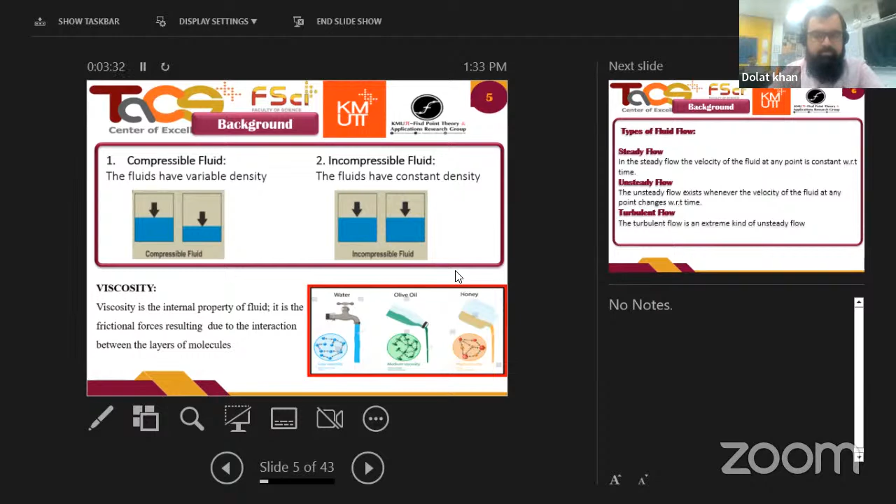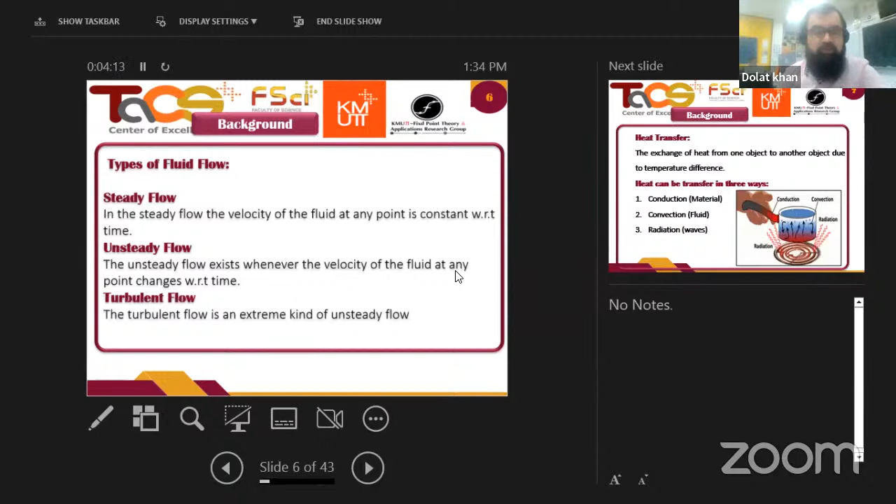Okay, we have many types of flow. Some of them are steady flow. In the steady flow, the velocity of the fluid at any point is constant with respect to time. It means it does not depend on time. On the other hand, unsteady flow exists whenever the velocity of the fluid at any point changes with respect to time. It means this flow depends on time. And after that, turbulent flow. The turbulent flow is the extreme kind of unsteady flow. It means it changes extremely with respect to time.

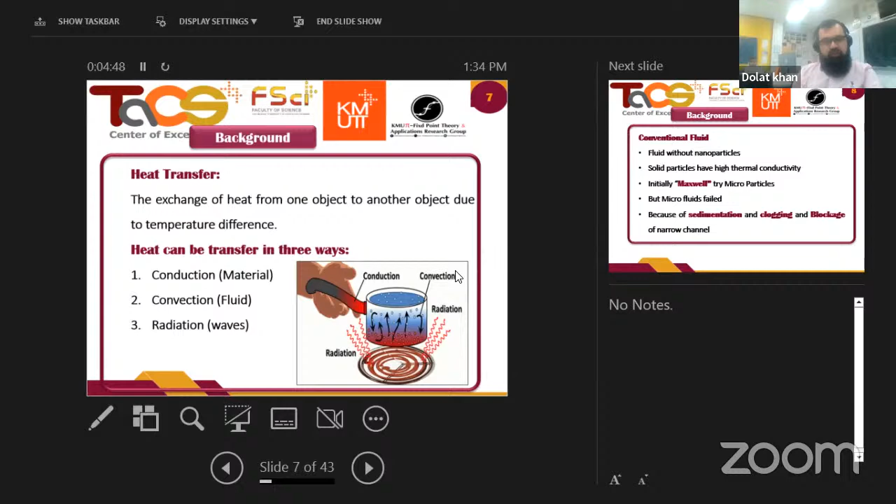Also, we take some heat transfer, so we must know about heat transfer. Heat transfer is the exchange of heat from one object to another object due to the temperature difference. There are main three ways. The first one is conduction. Conduction is that type of heat transfer which transfers the heat through material. The second one is convection, and this type of heat transfer occurs in fluid. And the third one is radiation, in which heat transfer occurs by waves.

In fluid dynamics, many researchers are working on fluid without nanoparticles, but it has a problem to enhance the thermal conductivity. For this purpose, we have some solid particles which have a high thermal conductivity and which can be used to enhance the thermal conductivity. Initially Maxwell tried to put microparticles in a base fluid, and it created a microfluid, but this failed due to sedimentation, clogging and blockage of narrow channels.

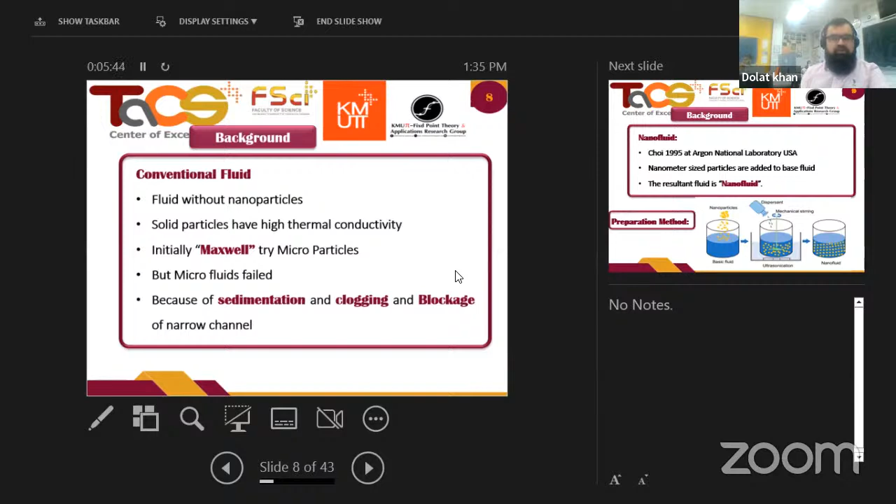After that, in 1995, Choi worked in Argonne National Laboratory in the USA, and he invented nanometer size particles and added them in a base fluid, and that became a nanofluid. And this nanofluid is used to enhance the thermal conductivity of fluid. This is the preparation of a nanofluid, in which we add some nanoparticles in a base fluid, and we create some nanofluid.

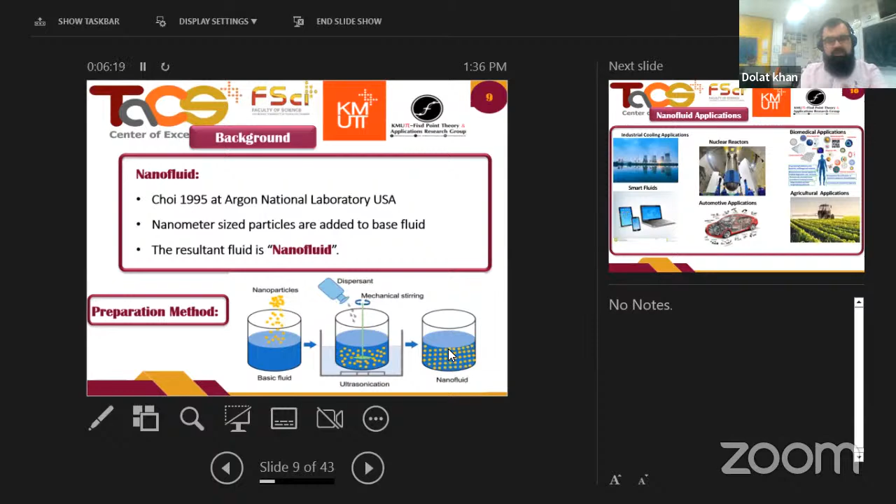These are the main applications of nanofluid, which can be used in industrial cooling applications, nuclear reactors for cooling purposes, biomedical applications for drug delivery, and so on, and also in computer and mobile accessories, in automotive radiators, and also some agriculture applications.

But after that, researchers worked on nanofluid and got a modified nanofluid, that is hybrid nanofluid. Hybrid nanofluid is the modified version of the nanofluid, in which we insert two or more nanoparticles at the same time in a single base fluid, which becomes a hybrid nanofluid. Initially researchers tried two nanoparticles, but nowadays researchers are trying to enhance thermal conductivity more. For this purpose, they tried the trihybrid nanofluid.

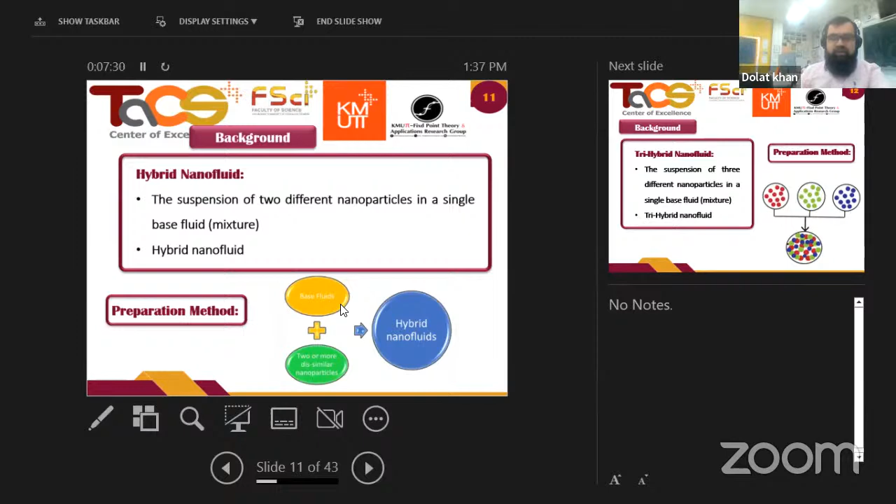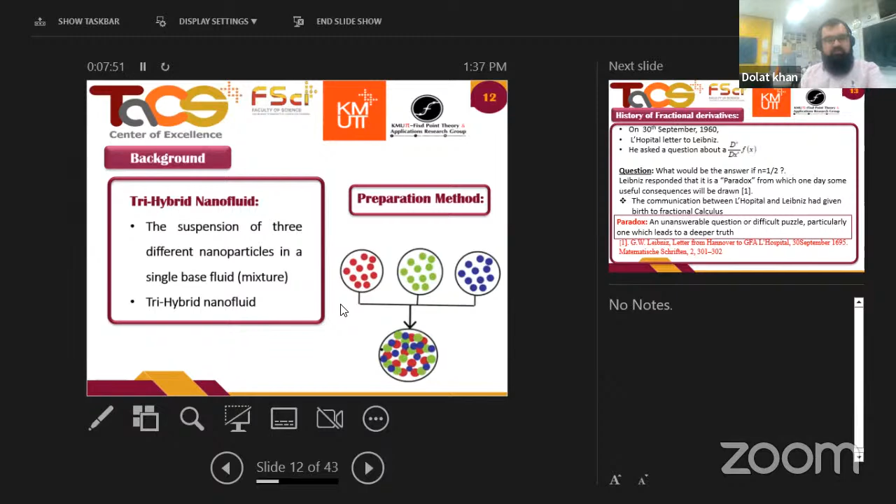So trihybrid nanofluid is a modified version of the hybrid nanofluid, in which we add three different types of nanoparticles in a single base fluid to prepare a trihybrid nanofluid. This is the modified form of the initial hybrid nanofluid. We use a fractional model for generalization of our problem, so we must know about fractional derivatives.

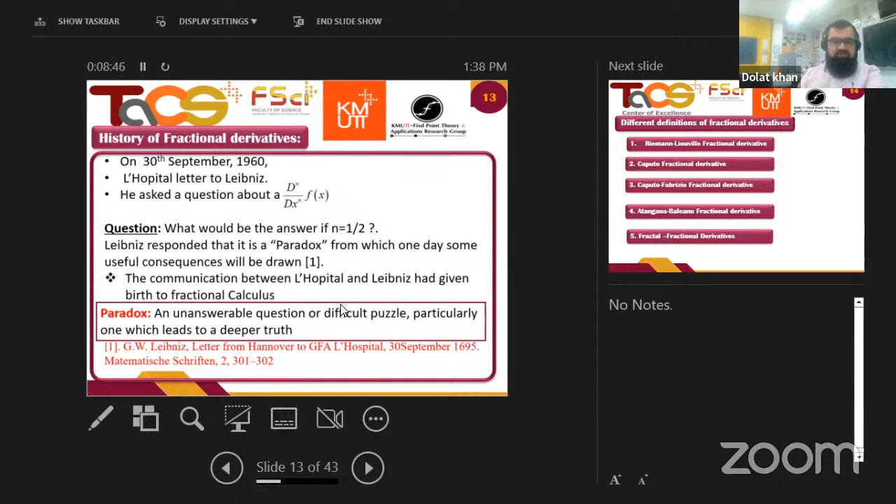Initially, on 30th of September 1695, L'Hôpital wrote a letter to Leibniz. He asked a question about the power of the derivative: what will happen when the power of the derivative becomes 1/2, fractional? Leibniz responded that it is a paradox, and one day maybe some useful consequences will be drawn. The communication between L'Hôpital and Leibniz gave birth to fractional calculus. This is the initial conversation, and we say this is the birth of fractional calculus.

After that, many researchers worked on different fractional derivatives, and some of these are the Riemann-Liouville fractional derivative, Caputo fractional derivative, Caputo-Fabrizio fractional derivative, Atangana-Baleanu fractional derivative, and all of these are used in different fields of research, in fluids as well as many other fields. But recently we tried the fractal fractional derivative, which is the newest fractional derivative used by researchers.

This is the significance of our study: the results obtained from this research will help enhance the knowledge of fractional models in fluid dynamics, nanofluid flow, and especially trihybrid nanofluid flow, and a base for complex non-linear flow problems recurrently taking place in engineering and applied science. This type of study can help engineers and scientists understand the physical trends and features of various nanofluid flows, that is nanofluid, hybrid, and trihybrid.

And the fractal fractional model will provide deeper study of the rheology of fluid flow as compared to the fractional and classical models. It means that the fractal fractional model will help provide more realistic phenomena, a more realistic model compared to the classical and simple fractional models.

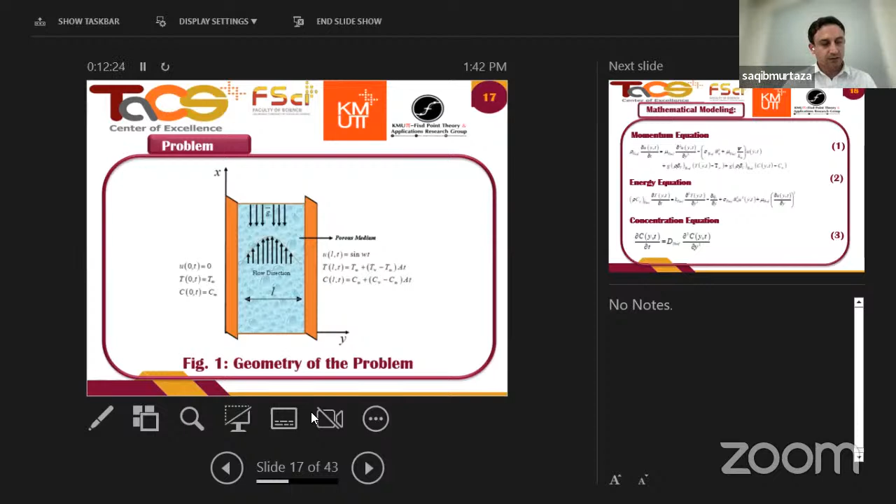So let me start from the geometrical configuration of the flow phenomena. In this geometry, we have considered an unsteady fractal fractional order model of nonlinear trihybrid nanofluid in an open bounded channel of length L. Furthermore, the impact of thermal radiation, Joule heating, and viscous dissipation has also been considered in this study.

Hello? Yes, I can. My voice is clear? Yes, yes. Okay, sorry for the interruptions. Furthermore, please go back to the geometry. Please go back to, yes, this one.

The impact of thermal radiation, Joule heating, and viscous dissipation has also been considered in this study. A magnetic field of strength B0 is transversely applied to the fluid flow. At the beginning of the analysis, both the channel and the fluid are assumed at rest, but after t = 0+, or t > 0, the temperature and concentration of the fluid rise to time-dependent concentration and temperature. All of these things you can see in this geometry. Please next.

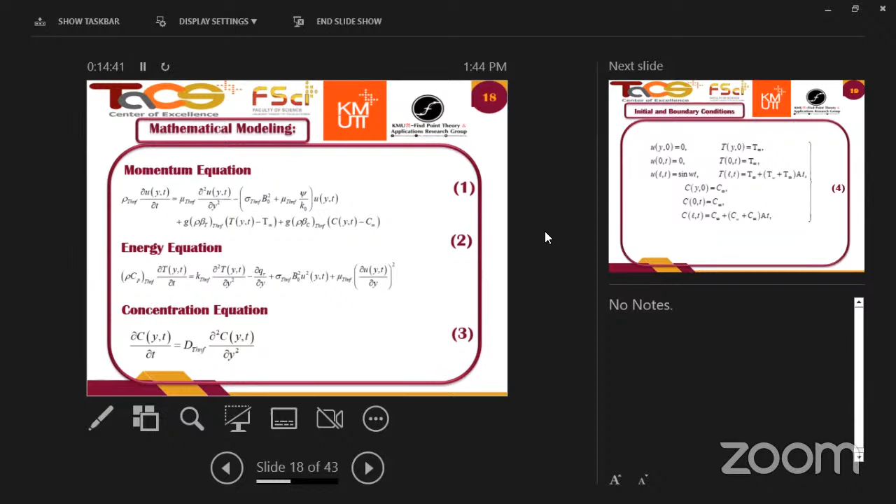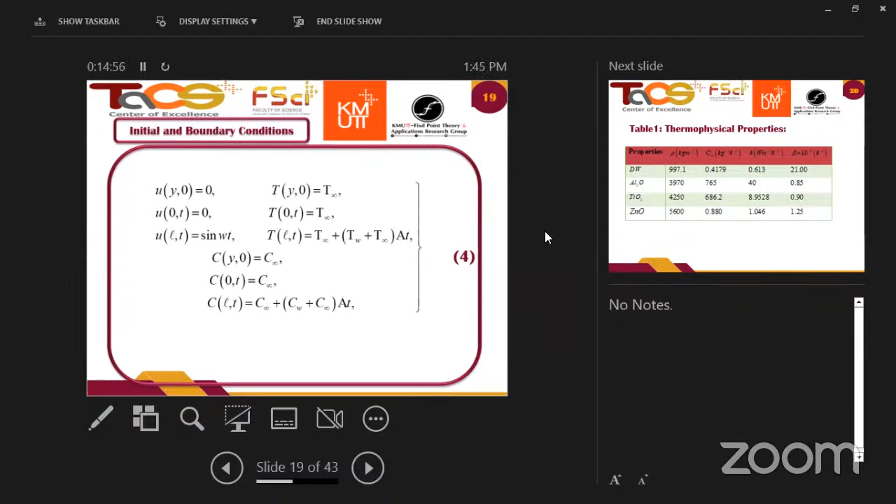These are the associated boundary conditions. At the left plate, we have no motion, but at the right plate, we have sinusoidal oscillations with sin(ωt). And also we have variable temperature and variable concentration.

These are the thermophysical properties of the base fluid and the three different nanoparticles. The base fluid considered is DW, that is distilled water. And the particles are aluminum oxide, titanium dioxide, and zinc oxide. All these thermophysical properties are obtained experimentally.

To make our system dimensionless, we will use the dimensionless variables given in equation 5. Incorporating all these equations, we will get our momentum equation in the form of equation 6. The heat equation will be in the form of equation 7. And

Next, please. Next, please. Yeah, we are already in the next slide. So I didn't see anything here. Okay.

Equation 8 is the concentration equation in dimensionless form, along with the associated initial and boundary conditions given in equation 9. These are some constants which we obtained during the non-dimensionalization process. These are also some constants.

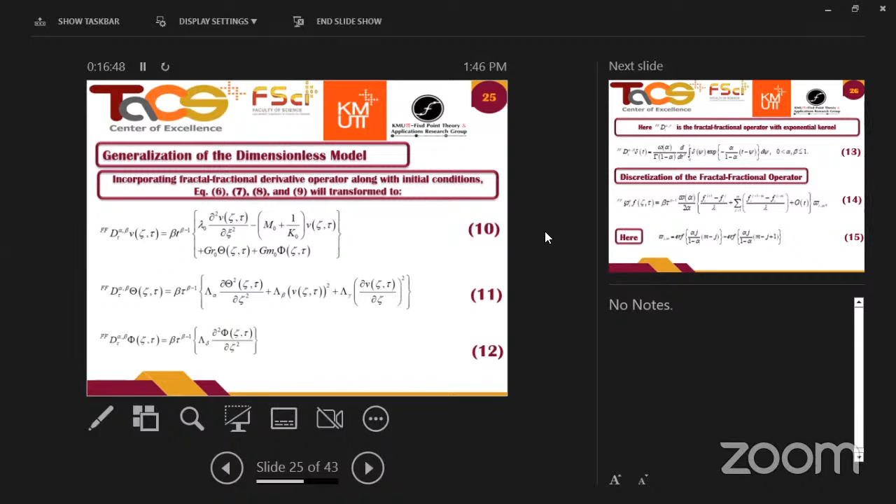Okay, now we will generalize our model by using the fractal fractional operator of Caputo-Fabrizio with non-singular kernel. So we will just replace the ordinary time derivative with the fractal fractional derivative, and we will get equations 10, 11, and 12. The fractal fractional operator is explained here in equation 13.

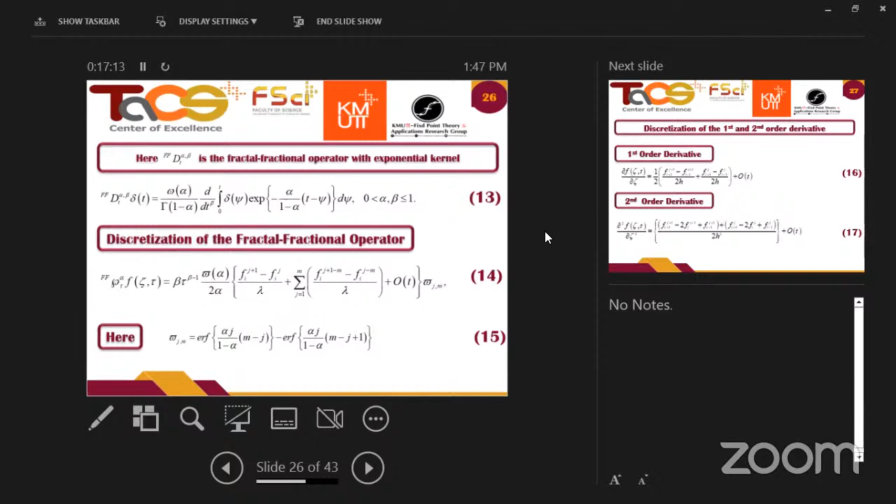Equations 14 and 15 are the discretization of the fractal fractional operator, because we are going to solve our problem with a numerical scheme, that is the finite difference scheme. So these are the discretizations of the fractal fractional order. This is the first order derivative discretization with the finite difference scheme. And equation 17 is the second order discretization.

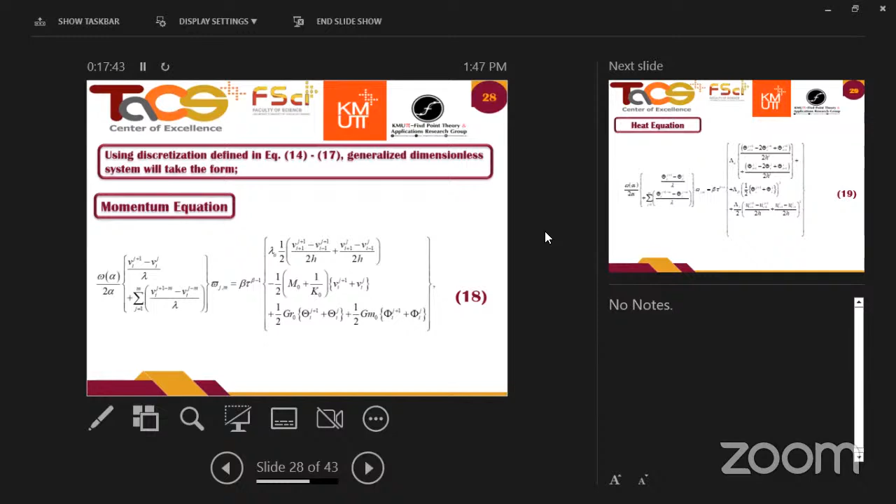Now, using the discretizations defined in equations 14 to 17, the momentum equation will take the form of equation 18. This is the heat equation in discretized form. And this one is the concentration equation in discretized form.

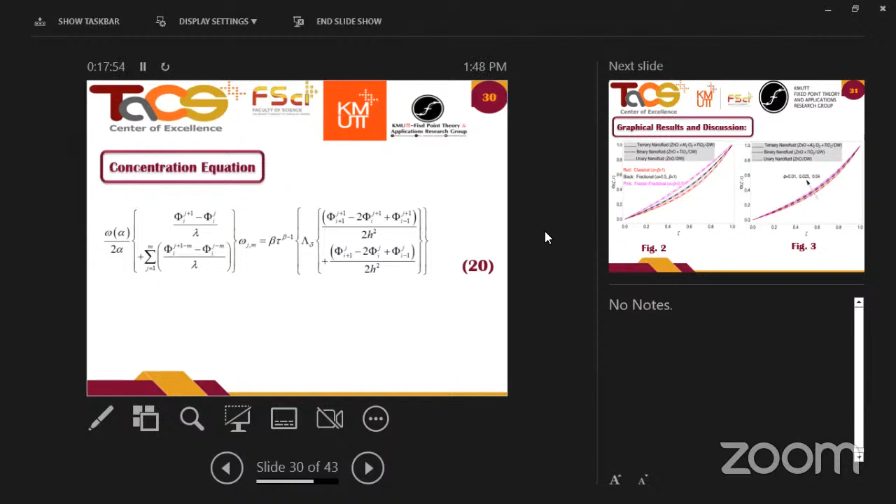Now we will plot the graphs in response to the embedded parameters. In this section, we will discuss the graphs with physical arguments. Figure 2 is plotted for the comparison of the fractal fractional, fractional, and classical models. The fractal fractional model is more general than any fractional and classical model, because one can easily deduce the fractional model and classical model from it by fixing its parameters according to the situation.

The fractal fractional model or fractional model is used to describe the memory effect of the fluid phenomena, and it is closer to real world problems. The fractal fractional model gives us a variety of solutions and multiple integral curves, and experimentalists can easily compare their field survey data with the best fitted curve.

Figure 3 has been drawn for the impact of the volume fraction of nanoparticles on the thermal profile. In all the models, temperature distribution shows an increasing trend for increasing magnitude of volume fraction phi. This trend in the thermal profile is due to the advanced thermophysical properties of the dispersed nanoparticles.

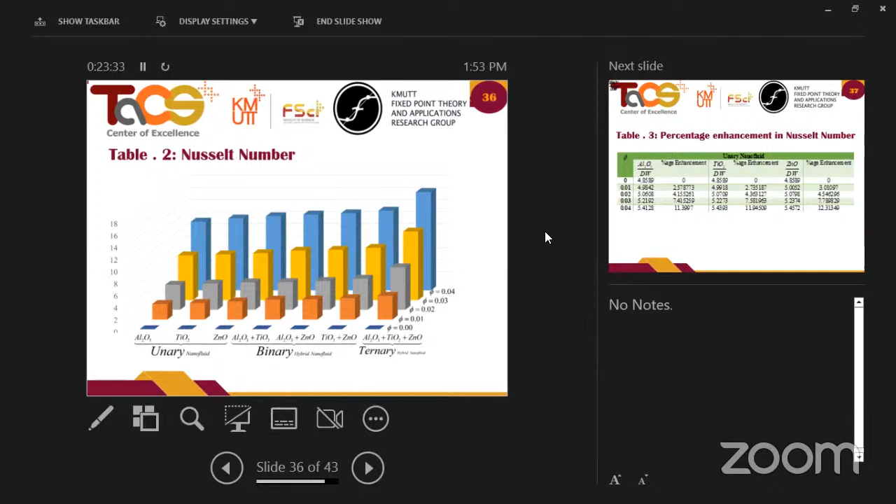Percentage enhancement in Nusselt number. The previous graph is supported by these numerical tables, and you can see for all the nanoparticles we have used individually, for 0.04 there is an 11% increase for aluminum, 11.94% increase for titanium, and 12.31% increase for zinc oxide. If someone is going to use these three, zinc oxide will be the best choice in this case.

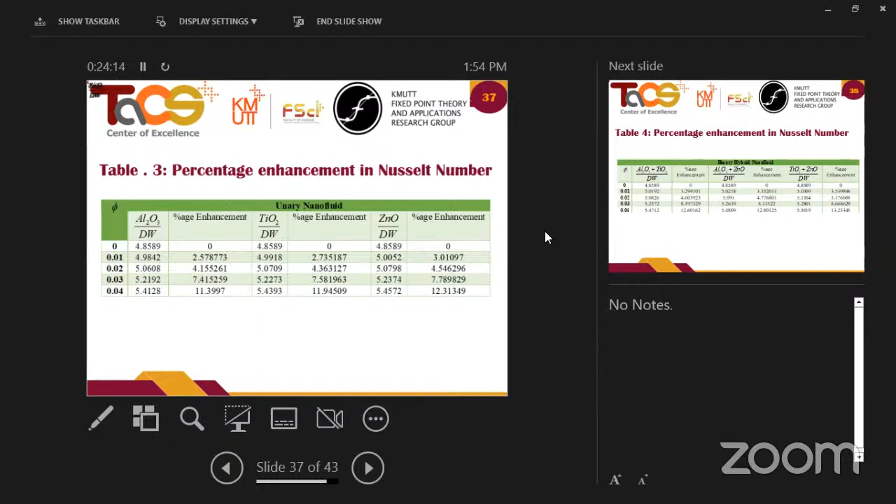Table 4 has been drawn for the hybrid nanoparticles, and we can see that when the value of phi reaches 0.04, for aluminum and titanium the percentage enhancement is 12.60. For aluminum and zinc, it is 12.80. And for titanium and zinc, it is 13.23. When experimentalists use all three particles at a time, they will get 16.33%, which is the best result in all of the cases.

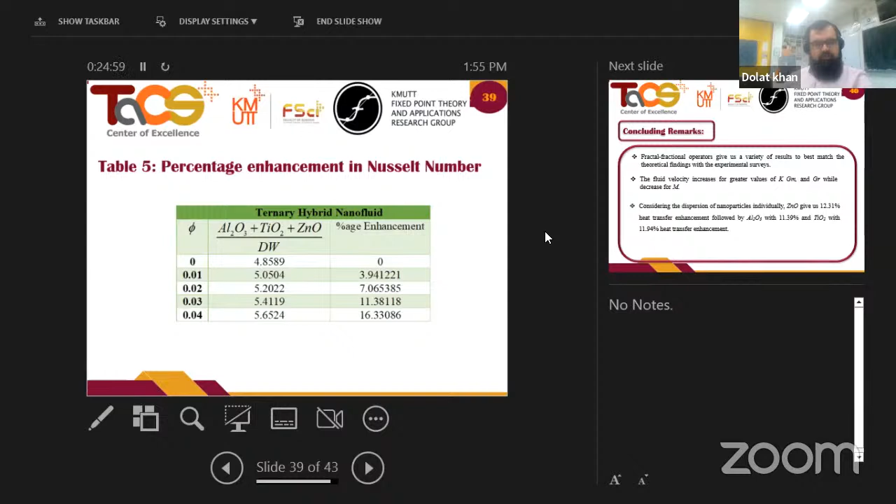These are some concluding remarks which we have drawn from our solutions. The fractal-fractional operator gives us a variety of results to best match the theoretical findings with the experimental survey. The fluid velocity increases for greater values of K, Gm, and Gr, while it decreases for M. Considering the dispersion of nanoparticles individually, zinc oxide gives us 12.31.

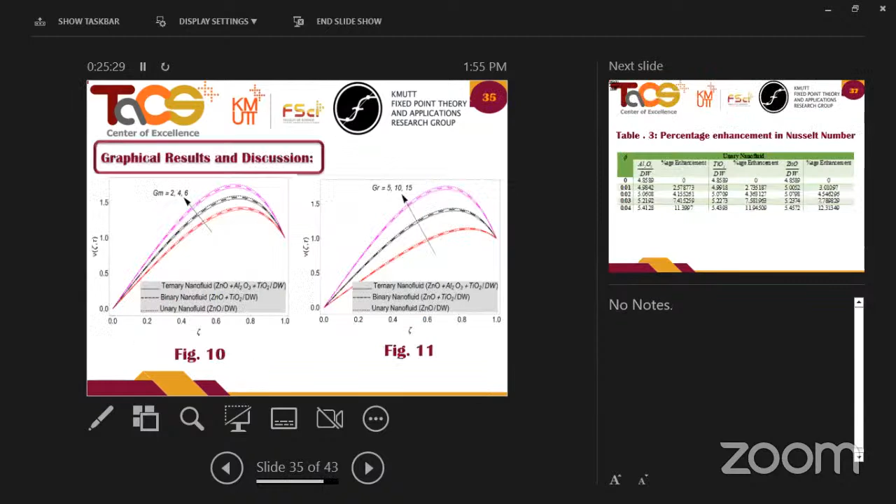Please come to the concluding remarks.

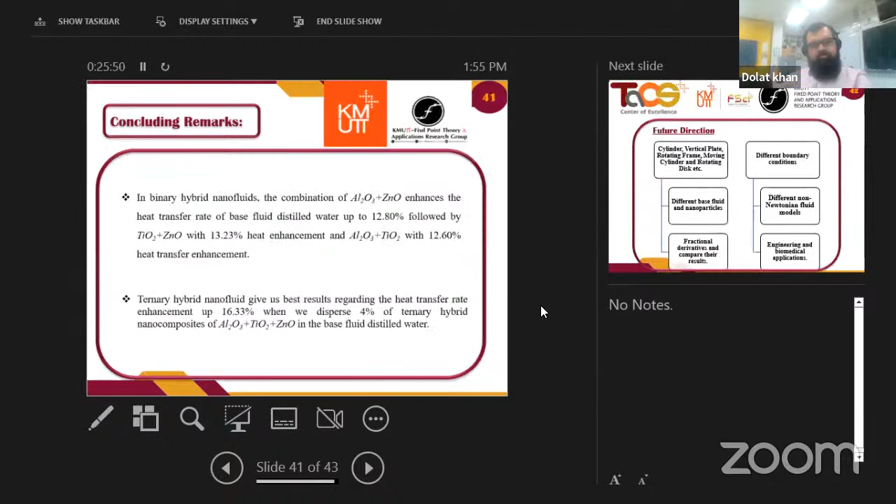Aluminium oxide shows 11.39%, and titanium oxide gives us 11.94% heat transfer enhancement. In binary hybrid nanofluid, the combination of aluminium and zinc enhances heat transfer up to 12.8, titanium and zinc 13.23, and aluminium and titanium 12.60. And in the last key point, ternary nanoparticles increase it by 16.33% when dispersed nanoparticles reach up to 4%, the best result in all of the cases.

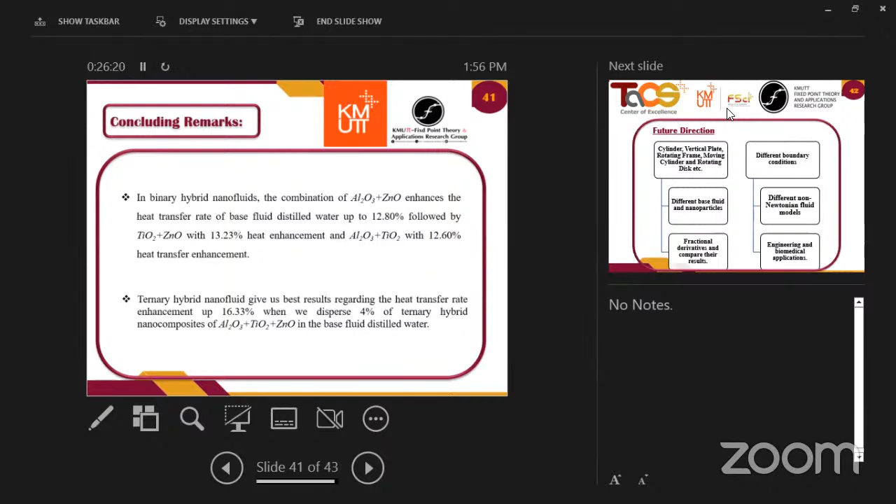These are some future directions. One can easily extend this model by considering different geometries, cylindrical, vertical; this is the researcher's choice. We can also extend it with different boundary conditions, different base fluids and nanoparticles, and different non-Newtonian fluid models with fractional derivatives, and compare their results. We can also extend the present model by connecting it with different engineering and biomedical applications.

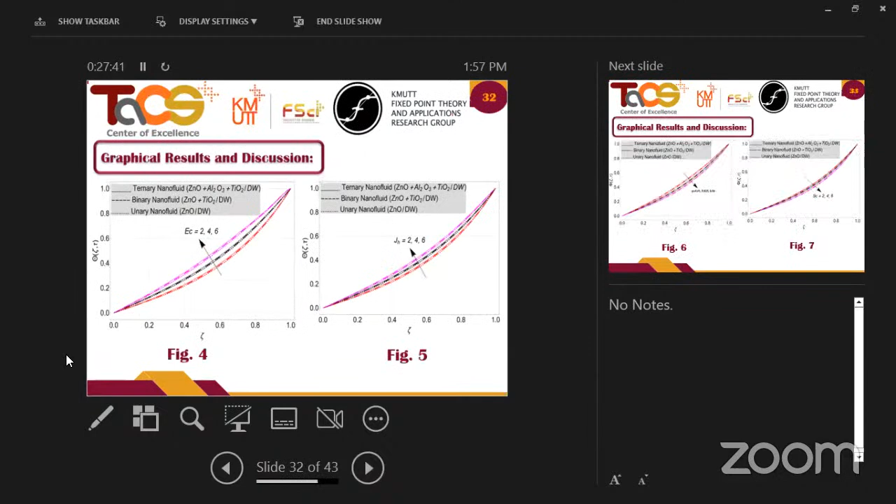Okay, can you show the table for thermophysical properties? This one. Yes. I want to know: the thermal conductivity for these 3 nanoparticles is very different, one is 40, one is 8 point something, and one is 1 point something. But in the table for the Nusselt number, the difference is very small. So how do you see this?

Very nice question from Dr. Talha. Here we don't have only one parameter, K, which you mentioned; we also have other parameters like Cp, density, volumetric expansion, and many more thermophysical properties. The heat transfer increase or decrease depends on all these parameters simultaneously, not only on K. Therefore, we see a minute difference between the heat transfer rates.

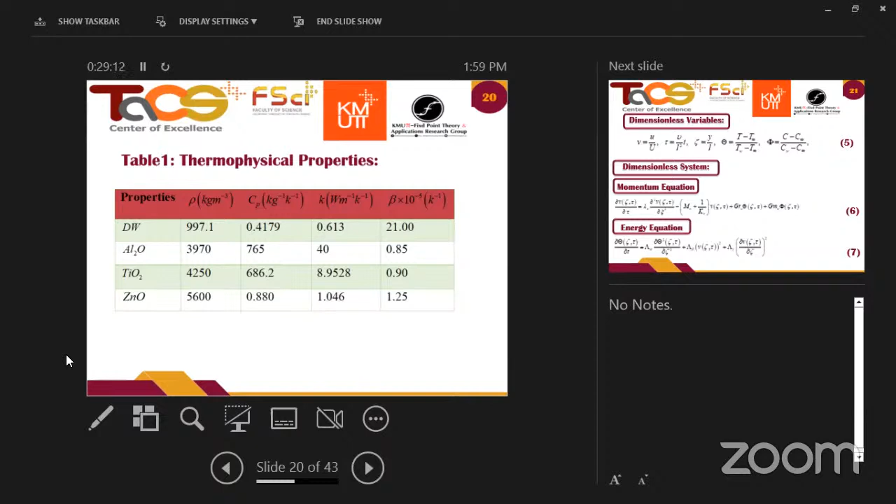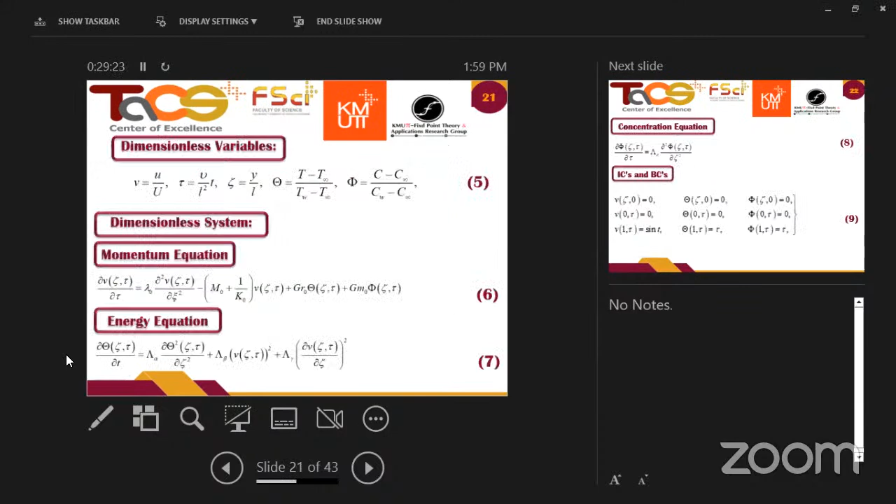Okay, can you show the dimensionless boundary conditions? This one. No, dimensionless, please. On slide 22. Okay, I thought there was some mistake, but okay.